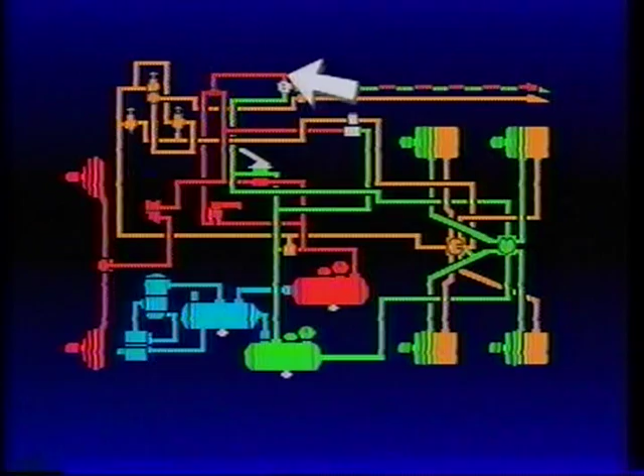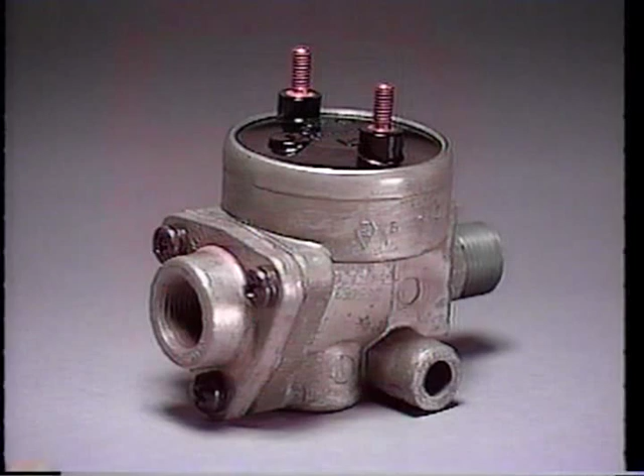Moving on, we must consider one additional device, the DS2 double check valve and stoplight switch. We learned in Part 2 that vehicles are equipped with dual brake systems, a protected braking circuit for the front axle brakes and a separate circuit for the rear. Since there is only one service line leading to the trailer, one or the other of the two braking circuits must be chosen to apply the trailer brakes. And, of course, the stoplights must be lighted regardless of which is chosen. That's the function of the DS2.

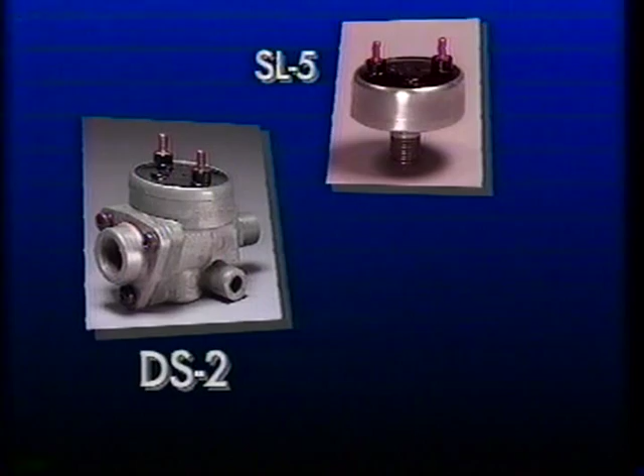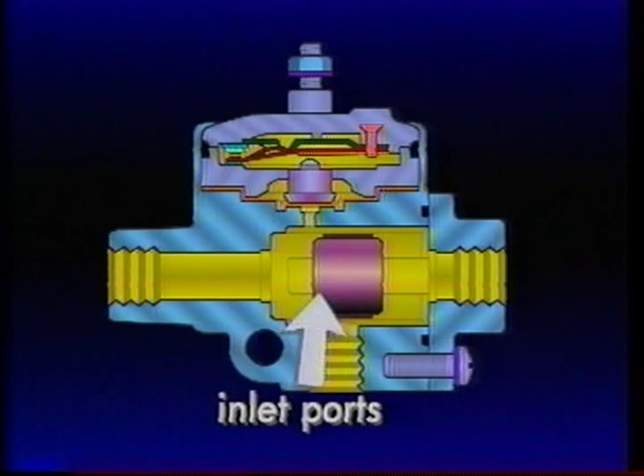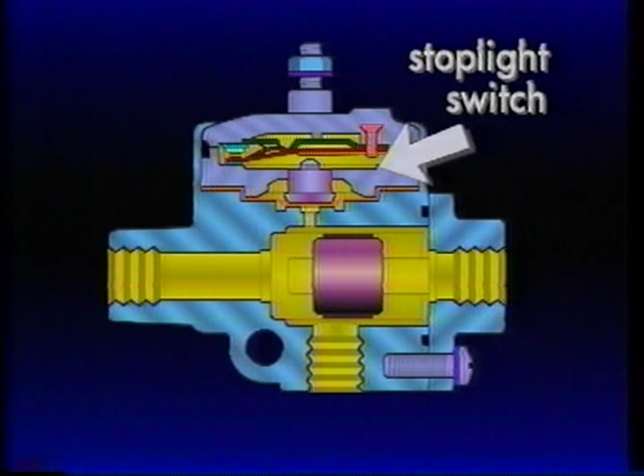It's a combination of two valves, the SL5 stoplight switch from Part 2 and the double check valve from Part 3. Like a standard double check valve, the DS2 has two inlet ports and one outlet port. The stoplight switch is positioned in the middle of the double check valve opposite the single outlet port. A shuttle riding in a guide travels between the two inlets.

Lines from the front and rear axle brake circuits connect to the inlet ports on opposite sides of the DS2. The outlet is normally mounted to the tractor service port of the TP3 tractor protection valve.

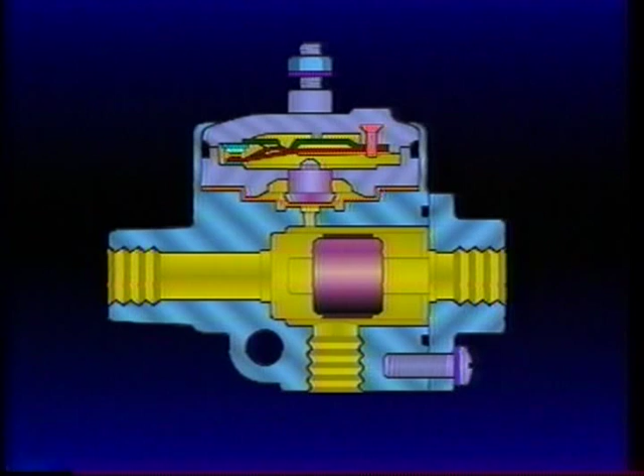During normal operation, brake application air from both brake circuits enters the DS2 inlet ports. Since the rear axle brake circuit pressure is slightly higher, the shuttle will move to close the front circuit side, at the same time moving the stoplight piston to light the brake lights. Rear axle application air flows to the outlet port, then through the TP3 and on to apply the trailer brakes.

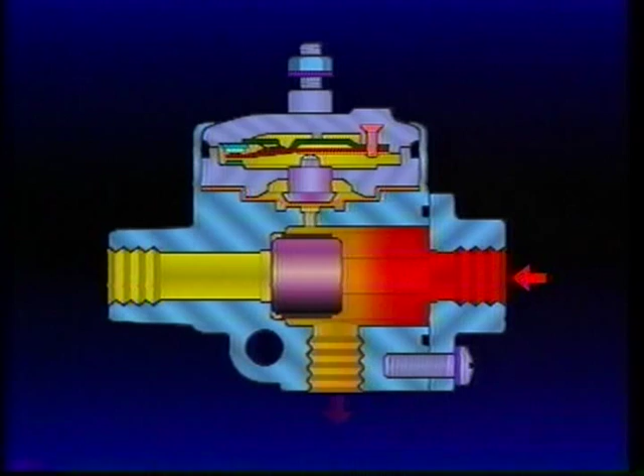If one brake circuit on the tractor loses air pressure, brake applications from the remaining circuit would still flow through the DS2 to apply the trailer brakes and light the stoplights.

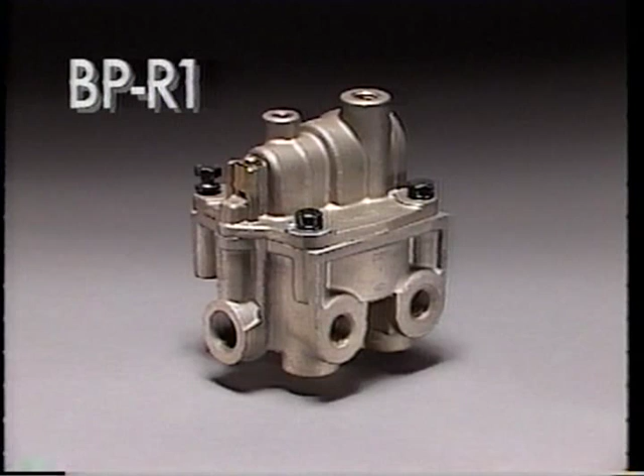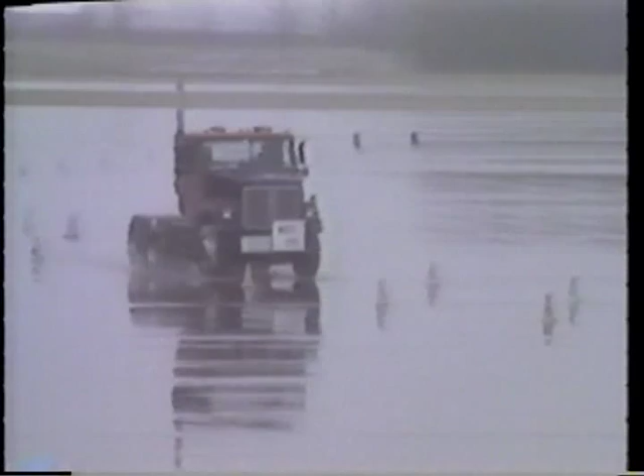Before going on to the trailer brake system, there is one accessory that should be considered: the BPR1 bobtail proportioning relay valve. The BPR1 combines a relay valve with a proportioning valve. It was designed for use in tractor brake systems only and replaces the standard R12 service relay presented in Part 2. The BPR1 improves control and reduces stopping distances by proportioning brake applications to the lighter rear axle brakes during bobtail tractor operation.

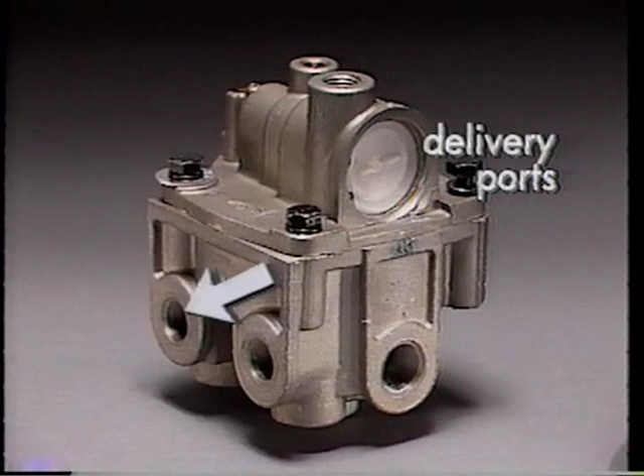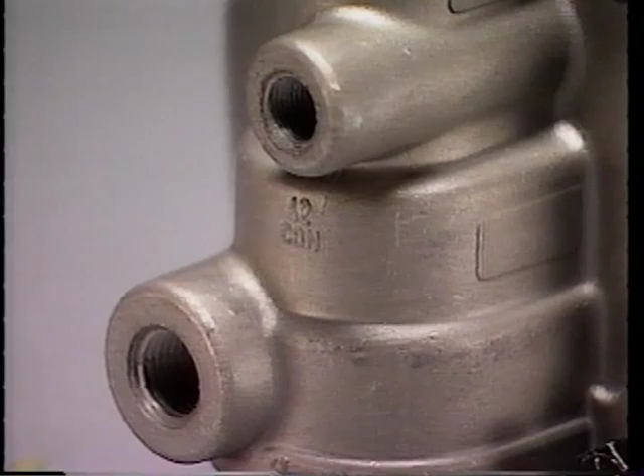The BPR1 body contains a standard service brake relay valve, while the cover houses the proportioning valve. There are 4 delivery ports, 2 supply ports, 1 control port for the relay valve, and another for the proportioning valve. All air connections are identified with cast-in letters. With the exception of the additional proportioning valve control port, the BPR1 air connections are exactly the same as the R12 relay it replaces.

This port is connected to the air line running between the PP7 trailer supply valve and TP3 tractor protection valve. During tractor-trailer operation, the PP7 delivers air pressure to the trailer and to the control port of the BPR1. So long as control port air pressure is present, the BPR1 functions as a standard service relay valve and delivers full braking pressure to the tractor's rear service chambers.

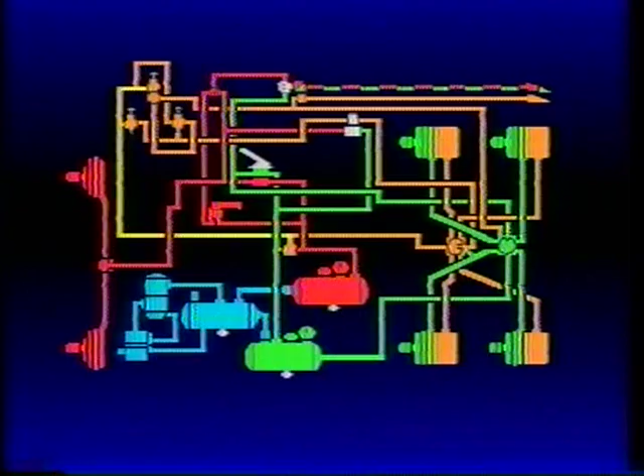When the PP7 trailer supply valve is pulled, the trailer supply line is exhausted. Pressure is removed from the BPR1 control port, signaling that the tractor is now in bobtail operation. With the weight of the trailer removed, the tractor rear brakes are overpowered.

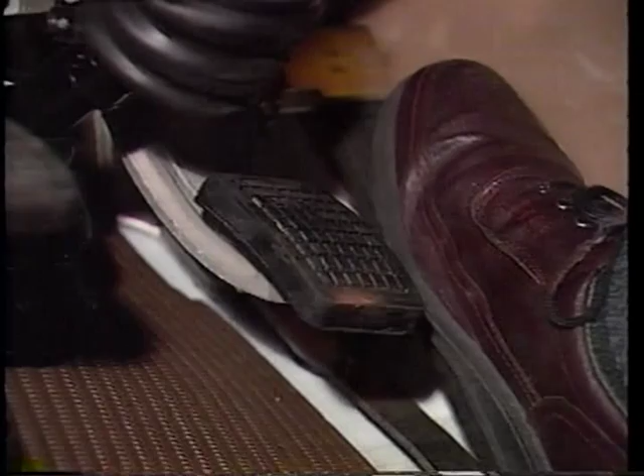In bobtail operation, the front brakes are capable of doing more to stop the vehicle than the rear brakes. They can use a much higher application pressure than the rear brakes. When the driver makes an application strong enough to take advantage of the stopping power of the front brakes, the rears skid and vehicle stability is diminished.

The BPR1 compensates for this by reducing application pressure to the rear brakes only and permits the driver to apply the foot valve in a normal manner. This takes full advantage of the front brakes without locking the rears. Vehicle stopping distances and stability are improved.

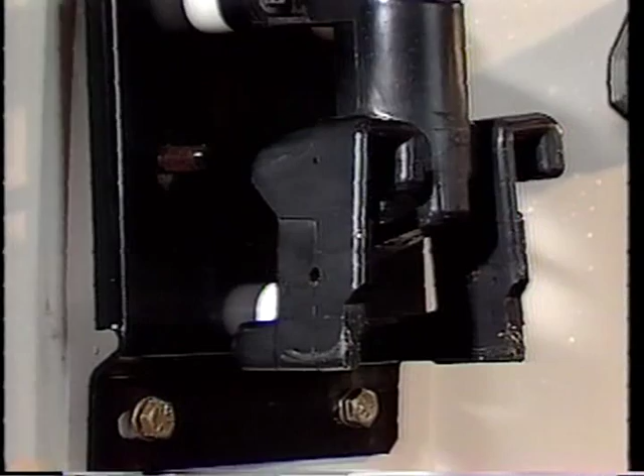Here's an important tip. Only vented dummy hose couplings can be used with the BPR1, and the vent must be open.

With the addition of the BPR1, the basic tractor system is complete.